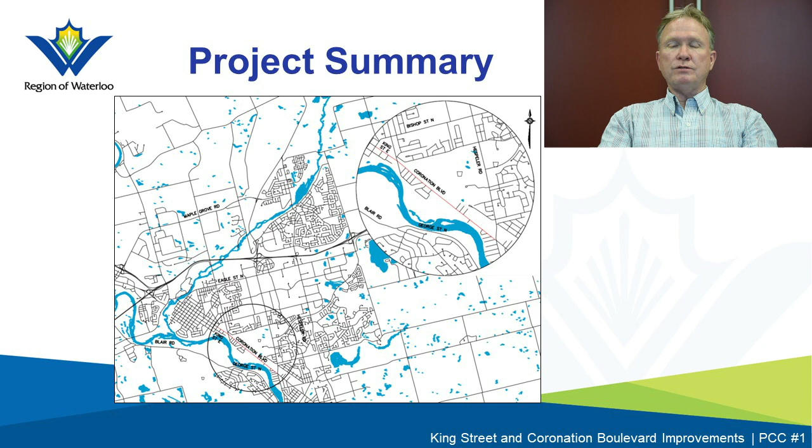This study will look at what improvements are needed for King Street East and Coronation Boulevard to accommodate the future modes of transportation along this roadway. We will consider all road users such as pedestrians, cyclists, and motorists. This is a Region of Waterloo project within the City of Cambridge.

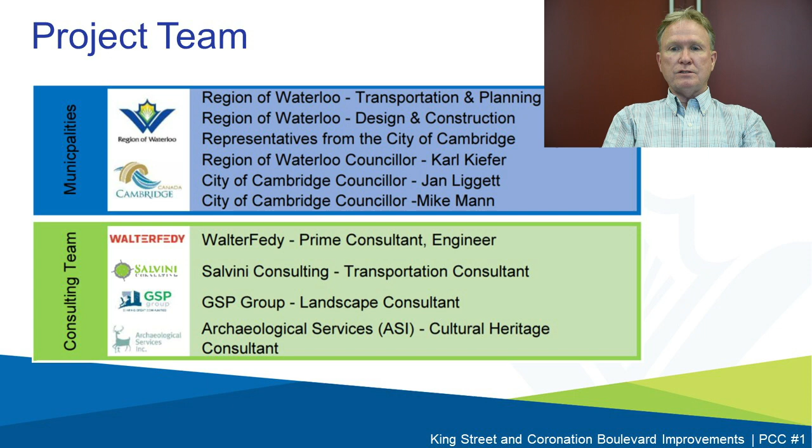Our project team includes transportation and planning representatives from the region and the city, as well as City Councillors Jan Liggett and Mike Mann, and Regional Councillor Karl Kiefer. WalterFedy is our consultant team on this project, and joining us today is Dan Schipper from WalterFedy Consultants. Dan is the consultant project manager for this project.

Thanks, Greg. Before we share the alternatives with you, I'd like to walk you through our project schedule. As you can see by the slide, today we are asking you for your participation and comments.

As part of this public consultation presentation, we will share 4 alternatives that have been developed by the project team based on current study findings and consultation. After we collect public comments and complete our remaining technical studies, the project team will develop a preferred alternative and bring that back to you at our second public consultation meeting.

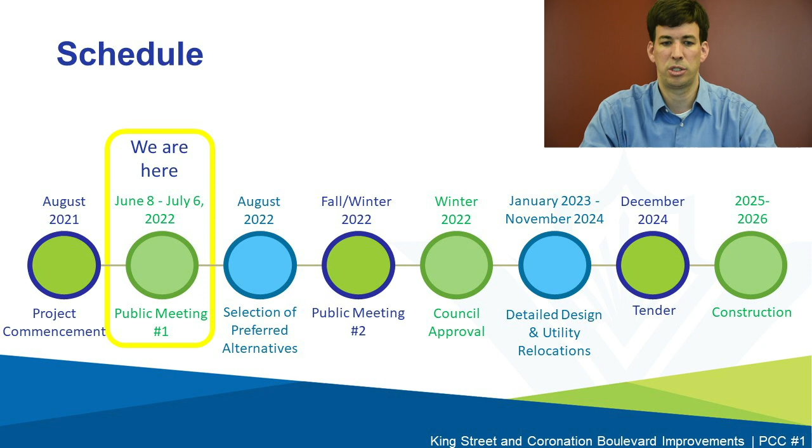Looking ahead, we will take a recommendation to Regional Council for approval, followed by detailed design, relocation of utilities, and then construction in 2025 and 2026.

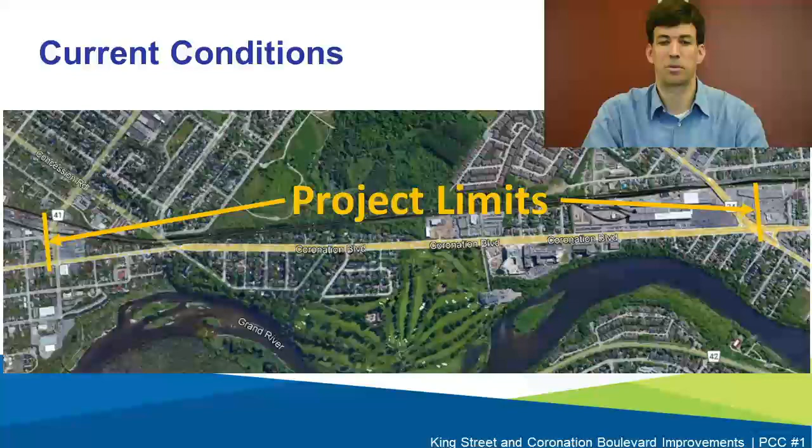The scope of our project is on King Street East from Bishop Street to Concession Road and Coronation Boulevard from Concession Road to Water Street, Hespeler Road. King Street and Coronation Boulevard are 2 distinct characterized roadways. As a result, these 2 sections have been reviewed separately with 2 alternatives each.

As for all projects, the first option considered for both King Street and Coronation Boulevard was the do-nothing option. In this case, the project team does not feel this is a viable alternative as the servicing infrastructure is at the end of its life, the current asphalt surface is in poor condition, and the lack of active transportation along this corridor is not in accordance with regional strategies.

For King Street, a multi-use trail on the east side of the roadway and a combination of sidewalk and cycle track on the west side of the roadway have been identified as the active transportation facilities. In order to accommodate these facilities, a reduction from a 4-lane cross-section to a 2-lane cross-section is required.

Taking into account current and future traffic volumes along King Street, a recent traffic impact study supports the reduction in traffic lanes to accommodate the proposed active transportation facilities. Two alternatives are proposed for the traffic lane configurations.

The first alternative illustrates a narrowing of the roadway to two lanes of traffic and includes left turns at Bishop Street, Brower Street, and Concession Road. It includes a pedestrian island at Brower Street to accommodate pedestrian movements across King Street.

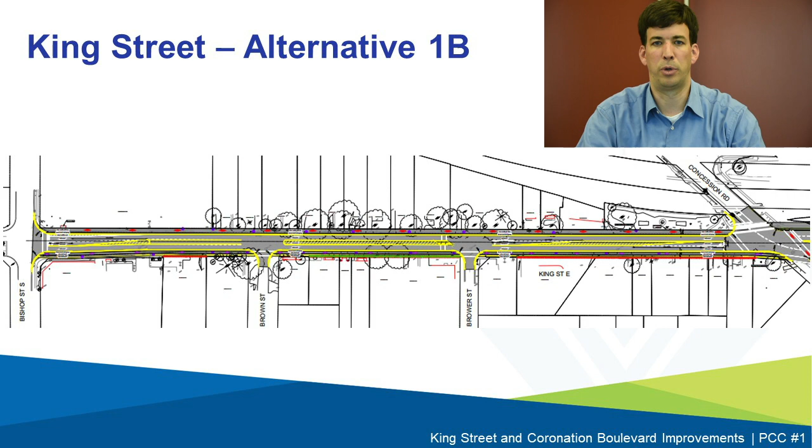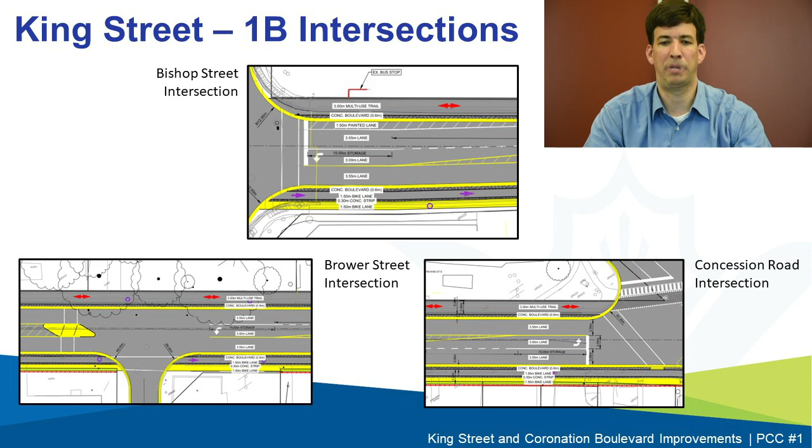The second alternative for King Street illustrates a narrowing of the roadway to three lanes, which includes a center lane and integrates designated left turn lanes. This slide illustrates the three-lane cross-section. Left turn lanes are required at Bishop Street, Brower Street, and Concession Road.

Shifting our focus from King Street to Coronation Boulevard, there are two options under consideration, which include a combination of sidewalks, multi-use trails, and two-way cycle tracks. With the inclusion of these active transportation facilities, the roadway corridor was reviewed and two alternatives are proposed.

The first alternative illustrates maintaining four lanes of traffic and reducing the width of the grass median from approximately 8 meters wide to 6 meters wide in order to provide additional boulevard space for snow storage, utility relocation, and separation between vehicular traffic and active transportation facilities.

This alternative maintains much of the current feel of the existing corridor and provides openings for U-turns and access to adjacent properties. This alternative maintains traffic signals at Oliver Avenue and the hospital parking entrance.

Pedestrian studies are ongoing to review the potential mid-block pedestrian crossing locations, which will be completed and presented as part of the next public meeting.

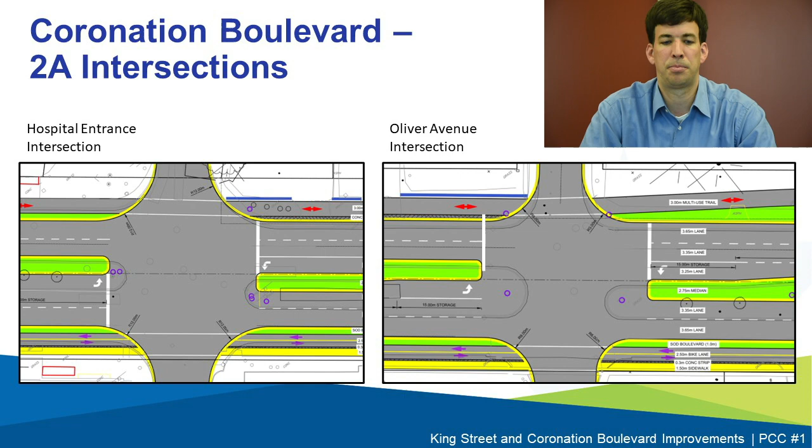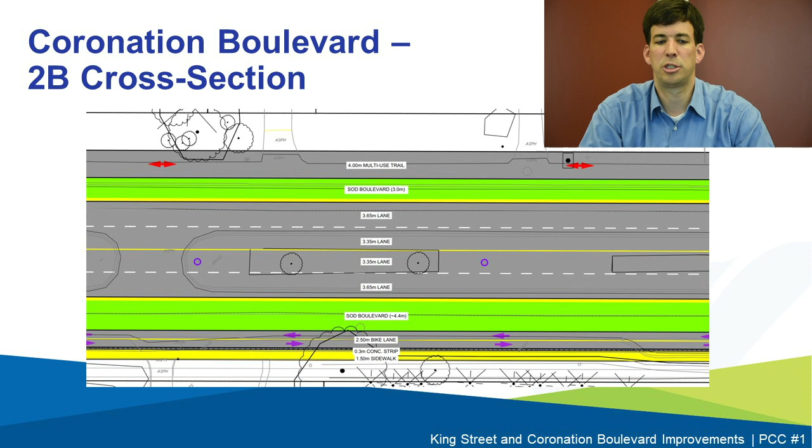The second alternative illustrates maintaining four lanes of traffic and the elimination of the center island. This alternative shifts the existing median space to the boulevard in order to provide greater access to adjacent properties and a wide boulevard space to allow for plantings, snow storage, utility relocation, and separation between vehicular traffic and active transportation facilities. This alternative also maintains traffic signals at Oliver Avenue and the hospital parking entrance.

As outlined in the Regional Active Transportation Master Plan, it is very important to achieve a diverse transportation system. The goal of this project is to balance the needs of all users, including vehicles, cyclists, and pedestrians.

The Region Transportation Master Plan calls for the inclusion of active transportation facilities along King Street and Coronation Boulevard in order to provide connection to existing facilities and improve access to Cambridge Memorial Hospital and downtown Galt. Alternatives have been evaluated by the project team to integrate active transportation while minimizing impacts to existing residents and businesses and increasing functionality of the corridor as a whole.

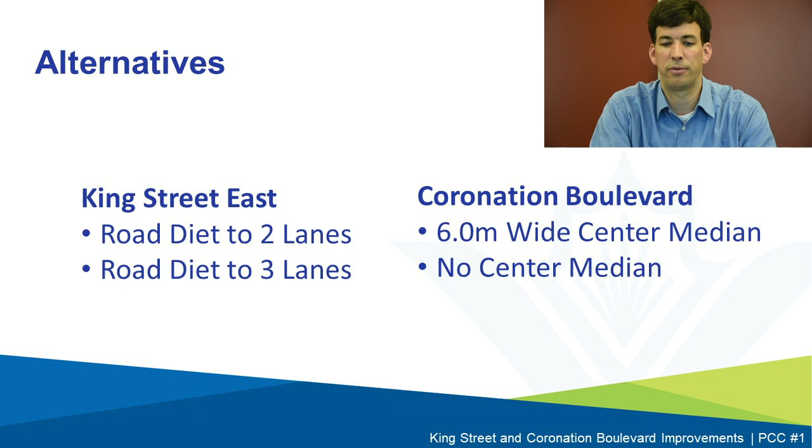And with that, I'm going to pass it back to Greg for final comment. Thanks, Dan. And that brings us to the end of our presentation.